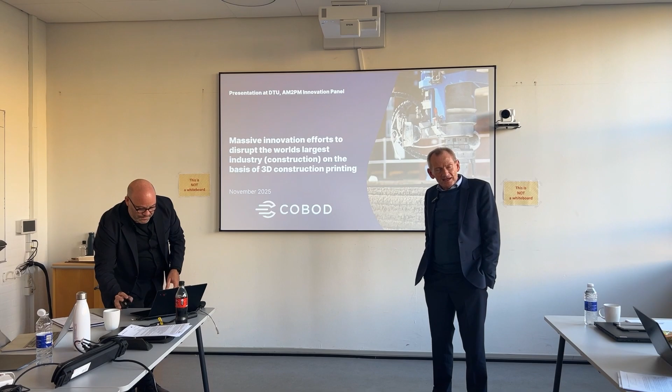Basically, we are trying to change the biggest industry in the world. That's a major undertaking, and we are trying to do it globally, so you almost cannot do anything bigger. So my thought has always been, we need as much help as we can get.

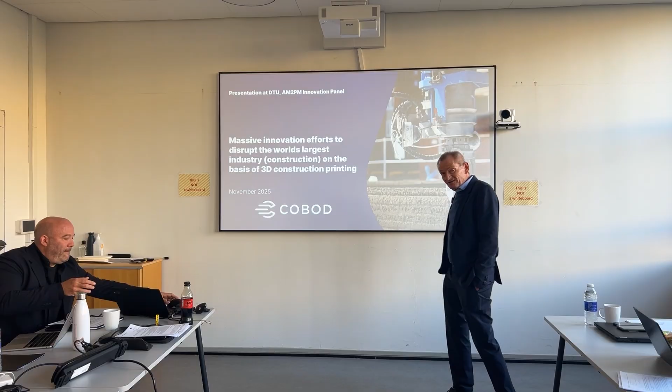Whatever you guys can bring to us and help us with is great for us, which is why we have always fertilized these academic relations and cooperated with academia in many different countries. We also actually sell our printers to a lot of universities. I think by now we have them at 7 or 8 universities, both here in Europe, in the Middle East, and in the US.

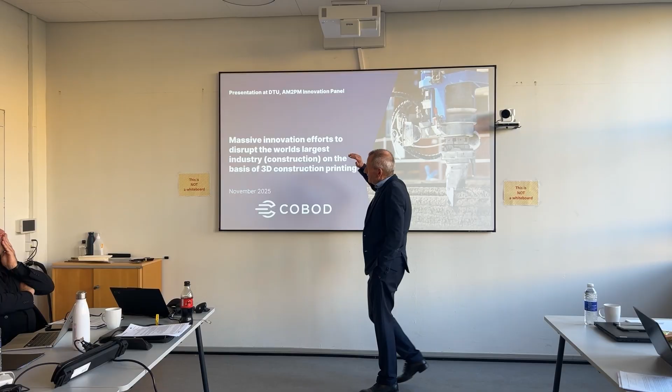Because we are trying to change the construction industry globally, we have to do massive innovation efforts, because we are trying to disrupt this industry on the basis of 3D construction printing.

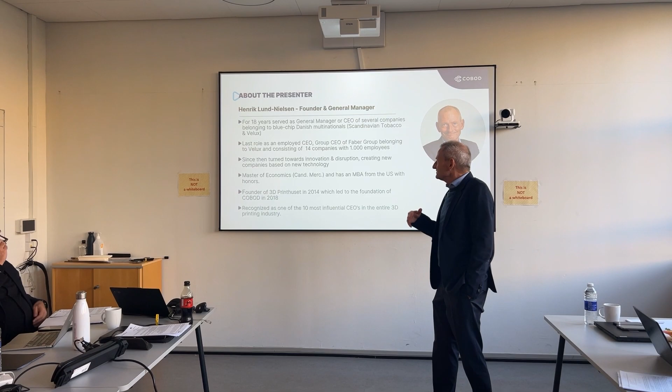And yes, it's true, as Aaron said, I was a hired gun. I was the CEO for the first 15 or 17 years of my career, ended up being group CEO of a company with 1,000 employees. I'm mentioning that just to make you understand I'm not green behind the ears. And you can also just look at me and see that I'm not.

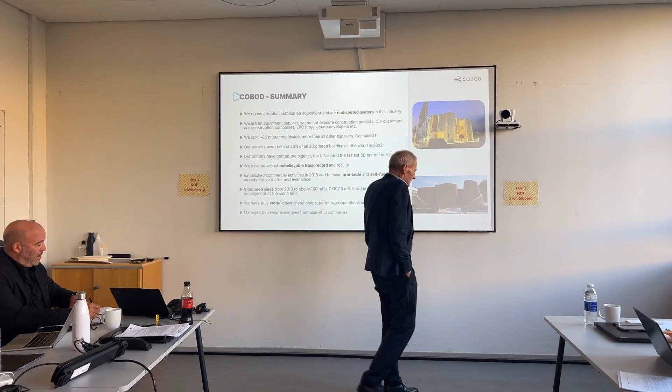But that's very different from other tech startups. So, summary about COBOD: what is very important to understand is that we don't do construction projects. We do technology, and we sell technology. We are a Caterpillar kind of company.

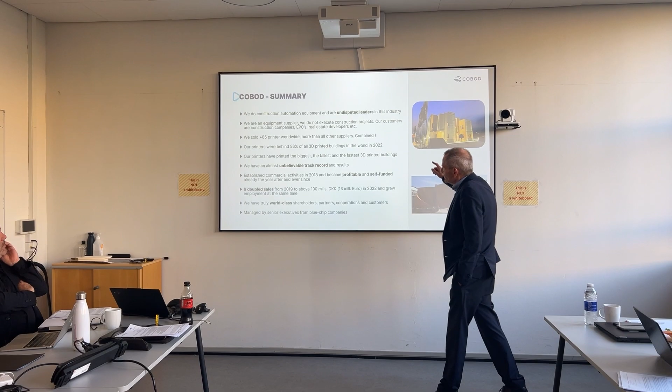We've now sold 85 printers worldwide. That is more than all other suppliers combined, even when you add up their sales. Most of the others have sold 2, 3, 4, compared to our 85. For instance, in '22, we counted all the 3D printed buildings made that year, and 56% of them was made with our technology. So we are clearly dominating.

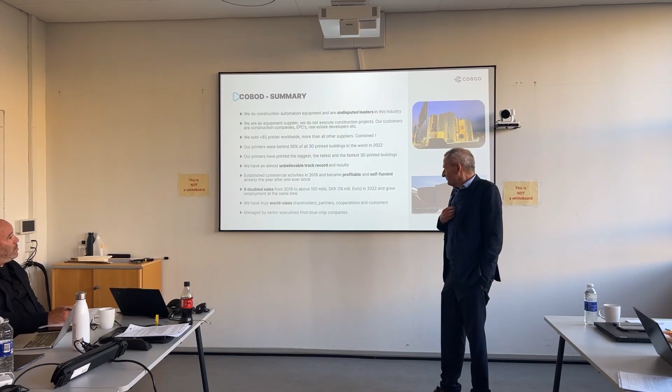We have also printed the biggest, the tallest, the fastest building, and so on. We have an unbelievable track record, also from a finance point of view, which is important to me: we became profitable already after 1 year. We had 1 year of losses, and then we started making money. That's very unusual for a tech startup.

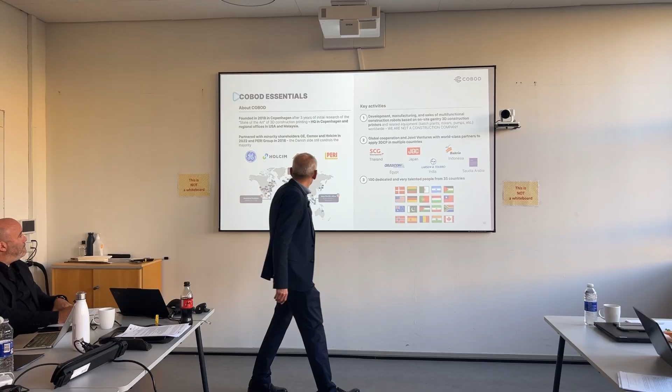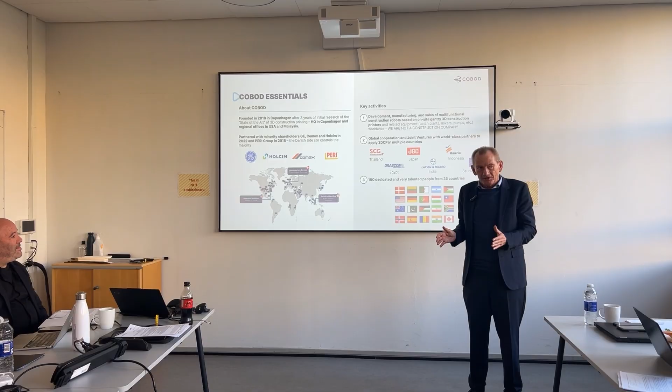If you don't give concrete shape with 3D printing, you give it shape with formwork equipment, and PERI is the leading provider of that worldwide. So that was a great quality stamp on us, that the biggest manual competitor came and said, hey, these guys we can't beat, we better join them. That was really nice.

Cemex, the 5th largest cement and concrete maker in the world. Holcim, the largest in the world. And then General Electric. So quite powerful minority shareholders, but Danish side still controls, we still have majority control.

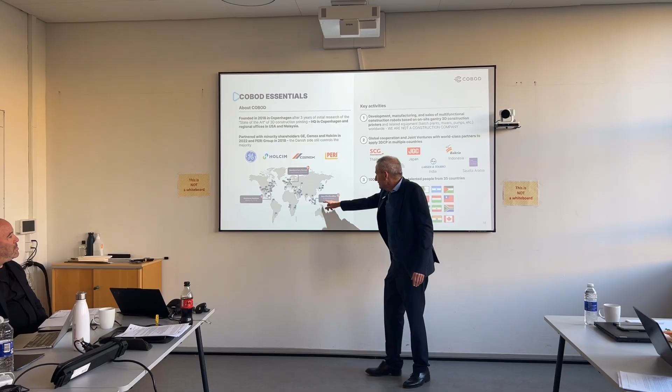As said, head office in Denmark, offices in Florida and Kuala Lumpur. Every time you see a flag, and it's not all flags that are there, it represents where we have printers, and you can see we are spread all over. We are on all livable continents of the world.

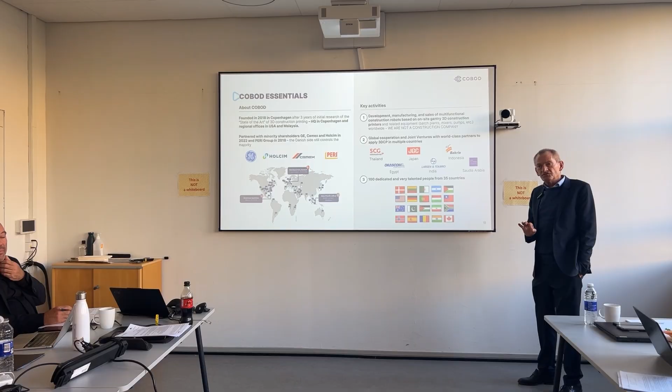So that's what we do. We develop, we manufacture, and we sell what I call multifunctional construction robots based on 3D printing. That will make sense to you later on in the presentation.

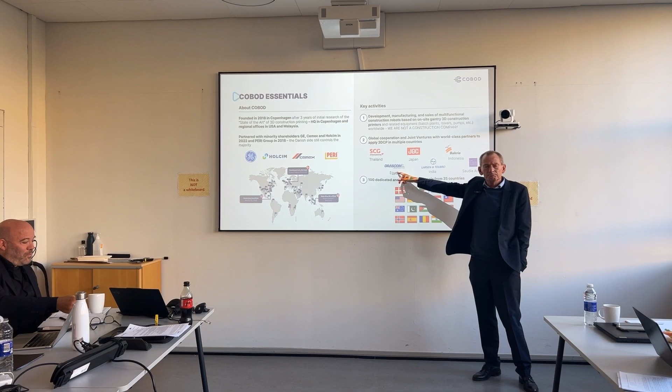Besides our shareholders, we also have some fantastic customers. Any of you know this company? Danish origin, actually, founded by 2 Danish guys back in 1938. 130,000 employees, biggest construction company in India, biggest construction company in Asia, huge company. Orascom, biggest construction company in Egypt, 50,000 employees, and so on. So we have a lot of high-power customers.

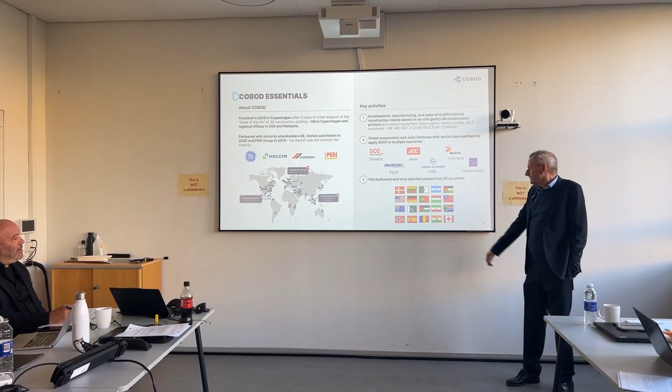Also quite fascinating, we are probably around 100 people, coming from 35 different countries. From the beginning, we have said we want the best talent, and we don't care where they're coming from. So it's a whole mix - we have Muslims and Hindus, people from all over the place. We actually have more international staff than Danish, and a lot of them are coming from DTU.

So why were we created? We were created to cope with this huge problem of construction, which is the lack of productivity.

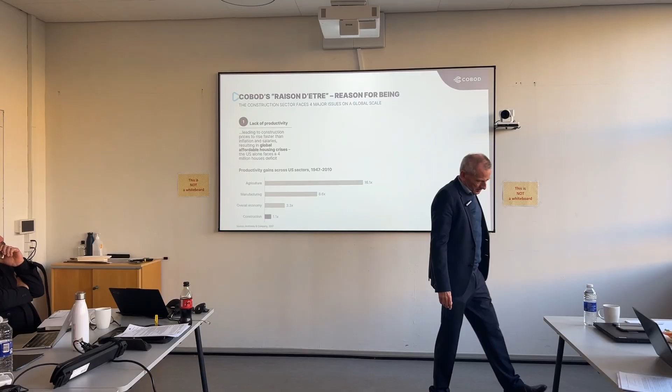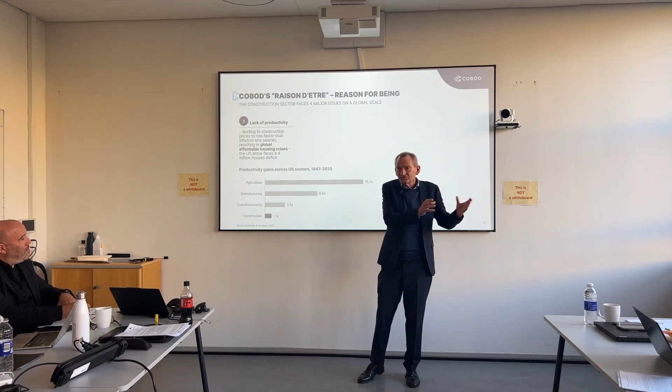All other industries have been industrialized and therefore increased their productivity. Relatively speaking, their products have become cheaper and cheaper. Think about a car: if you buy one for 30,000 euros now, the same car 20 years ago, in much worse quality, also cost 30,000, because productivity gains ate the increases in material cost and labor cost.

That didn't happen for construction. That's why we see a housing crisis almost everywhere. We are getting richer and richer as countries, but fewer and fewer people can afford their own house. This is the reason: lack of productivity. Hence, there's a huge need for automating and industrializing the construction industry.

The other reason is, of course, nobody wants to do this work anymore. Ask young people to do physical construction work - no, thank you. Give them a laptop and let them play around - yes, please. This is a huge problem, especially in a country like Japan. For every 5 people that retire in the construction industry, they can hire one. They simply run out of people to build, so we need to automate in order to continue building the same amount.

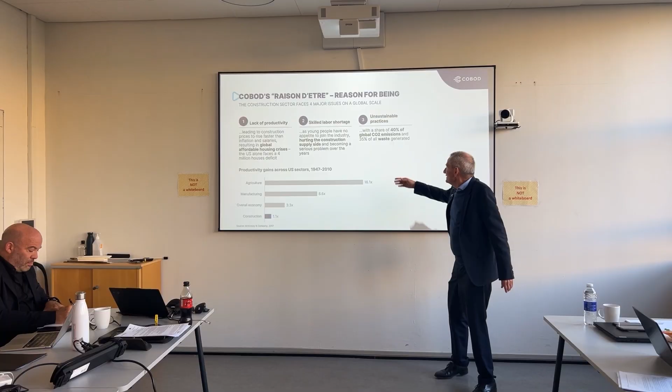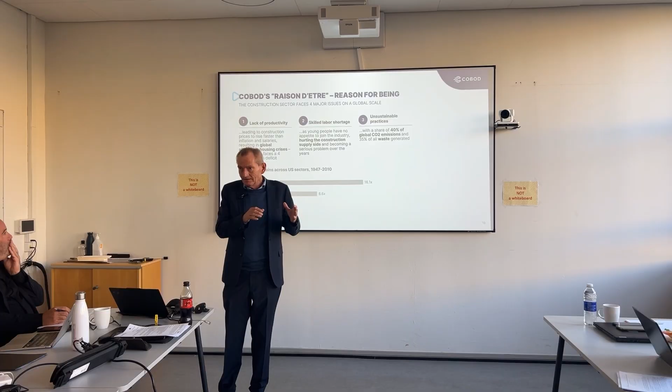And then, as you also pointed out, Aaron, it's very unsustainable what we do. A big part of that is we use concrete, and concrete with its CO2 is not good, but it can be made better. The cement factories are really working on it - they're working on becoming net zero by 2050. They will have changed the way they produce, so they'll have net zero cement.

The other reason is that we simply use too much material because of limited design possibilities. When things have to be straight all the time and have 90-degree corners, you end up spending way too much material. I'll give some examples of that.

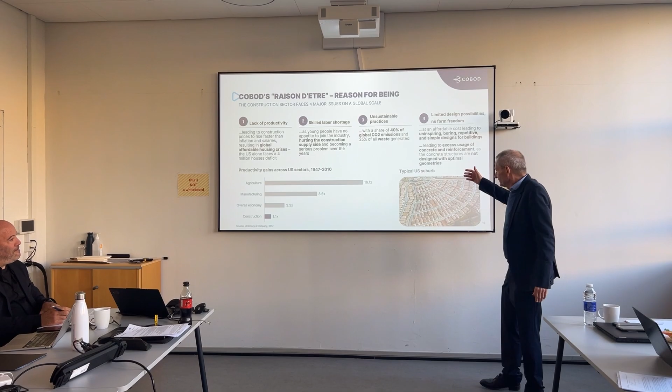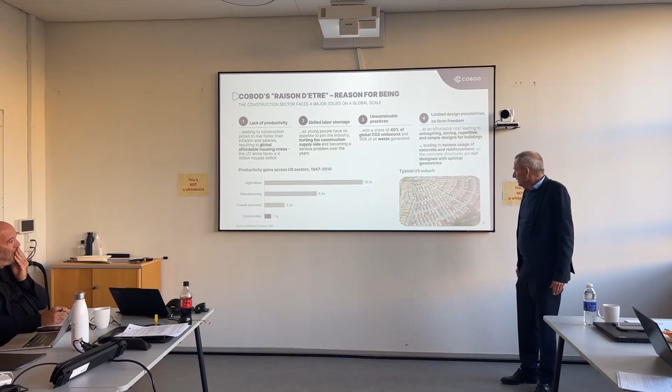Also, the other consequence of limited design possibilities is you create these boring designs and then repeat them because creating new ones is simply too expensive. So you end up like this - this is a US suburb - you get dropped off, you live there, but you can't tell the difference because they all look the same.

So this is where we can help, because we can automate, which means lower labor cost and less need for scarce skilled workforce, more precision, quality, and safety. Speed - we can execute much, much faster.

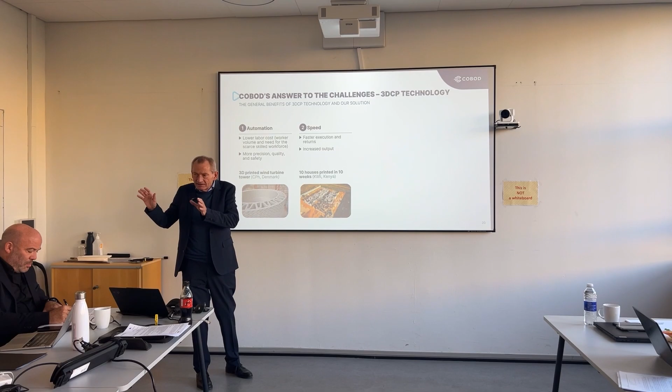This is an example from Kenya. Try building something in Kenya - 1 house, 1 year. Here we did 10 houses in 10 weeks. We didn't do the entire house, we did the walls - or rather, our customer did. Sustainability - this is what I spoke about before.

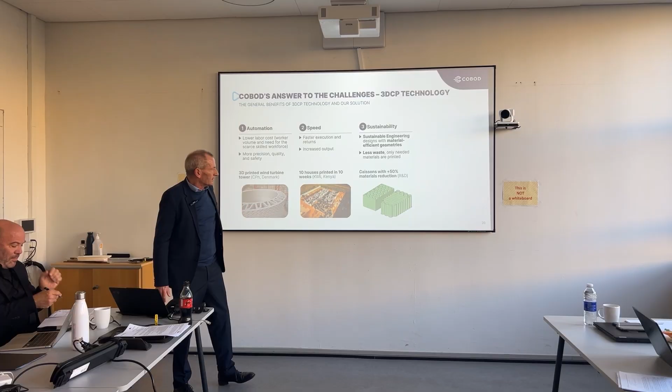This is a traditionally made caisson underwater foundation. This is an optimized design, because we can optimize it - we can give it the geometry that provides maximum support to the structural engineering solution. 53% less material. For years we built it the traditional way because that's the only thing we could figure out with conventional solutions, but we couldn't do it like this and spend half the amount of material. Mind-blowing, huh?

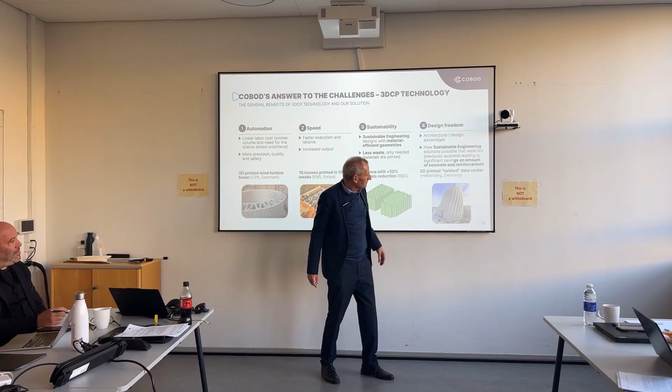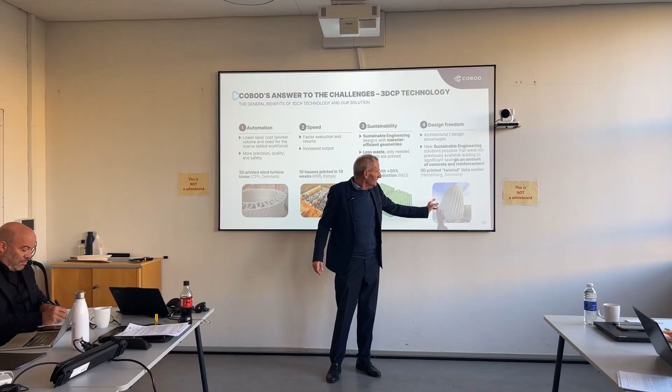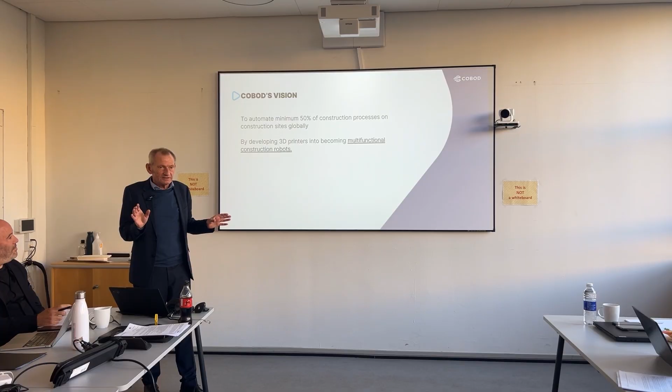So our mission is to enable the construction industry to build smarter using multifunctional construction robots based on 3D printing. We want to do visually appealing things with high quality, both buildings and concrete structures, faster, cheaper, and more sustainable using our technology. And the vision is that at a certain point we can automate 50% of all processes on a construction site - not 100%, that's too much, that's probably never going to happen, but at least 50%.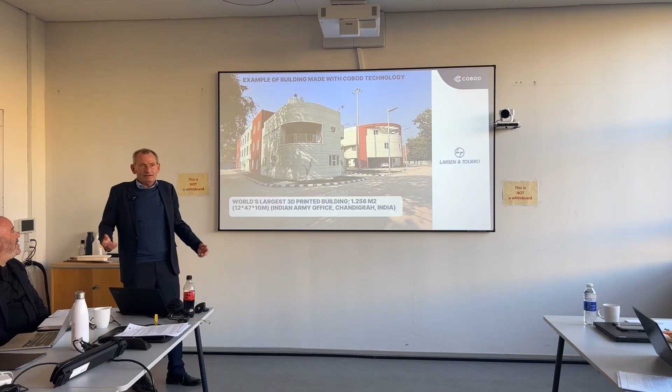This is the largest 3D printed building in the world presently. Unfortunately, we have not been able to do PR about it because it's for the Indian army, so it's difficult, but it's quite nice, huh? Actually, the whole site has 4,000 square meters of 3D printed building. So forget this thing about printing 50 or 100 square meter houses - this industry is becoming bigger and bigger, taking over more and more construction jobs that are bigger and bigger.

This is an example from Ireland - it's a row house, one unit, one unit, one unit, 110 square meters each. Built 35% faster than conventional construction, and built according to the new ISO standard. Really nice - is that rounded corners or does it just look like that? They're always a little bit rounded because we can't do 90-degree corners.

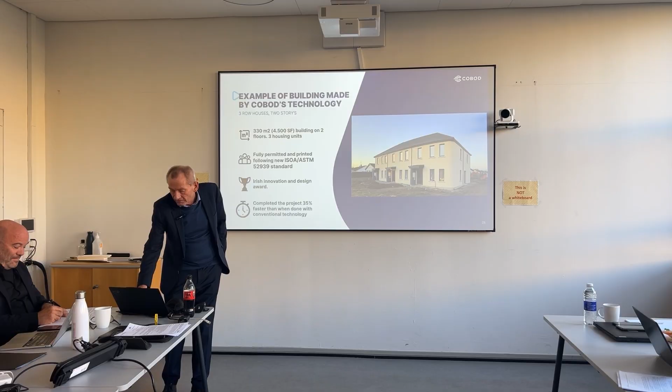This is a video of how it was done. Is it playing? Maybe I have to do... yeah.

So where we are distinguishing ourselves from the competitors is scale, right? We do big things.

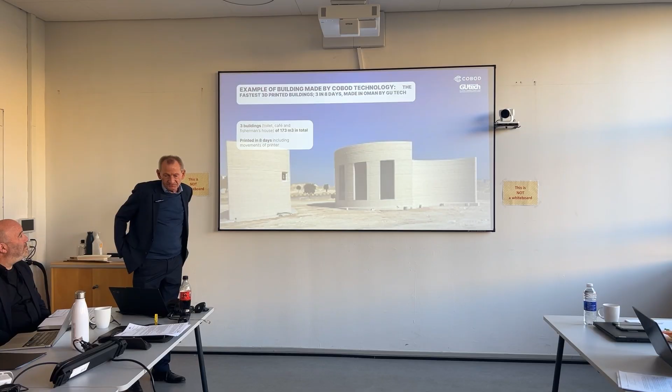This is examples of how fast you can build. This is from Oman. They did 3 different buildings, respectively a toilet, cafe, and a fisherman's house in 3 different locations. First they set up the printer here, then over here, so they moved the printer. 3 buildings, 8 days. That's 2 to 3 days per building, right? And because we're in the Middle East and it's bloody 48 degrees during the day, they print at night.

That's so impressive. Yeah, and the next one is drink some water, because it's very hot. Even at this time it's 40 degrees or something, right? Yeah, this is a small toilet, it's almost printed in just one evening. Anyway, you get the idea.

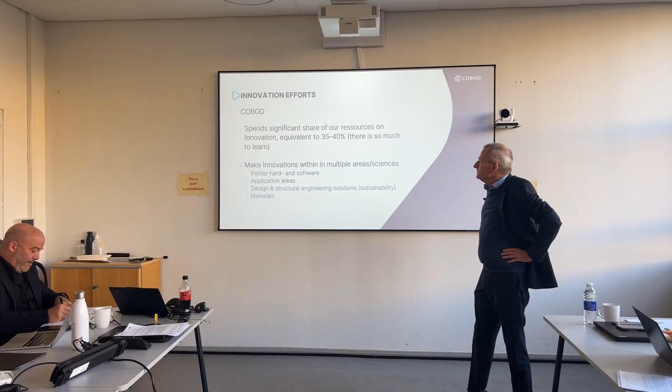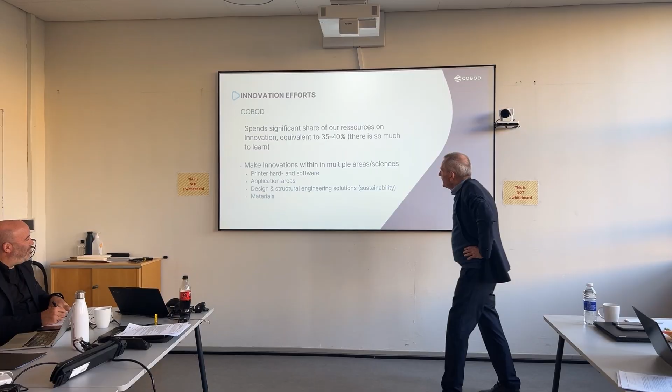Focusing now on the innovation efforts, we spend a really large share of our resources, our people, our cost, on R&D, on innovation. It's 35 to 40%, so it's a massive amount. I think it's even more than Novo Nordisk. And we still manage to make money, so this is not bad, huh? Yeah, at least until further.

So we do make innovations within multiple areas or sciences. We do, of course, printer, hardware, and software. That's what you normally think about that we would do, that we would develop our technology and the related software. But that's not it.

We also do, that's actually where we do the most, in terms of application areas. So we are the first to think about how our technology can be used for new application areas. Because the thing is, the customers will not buy our technology for an application unless we have proven that it can be done. So we have to go in the front and do it.

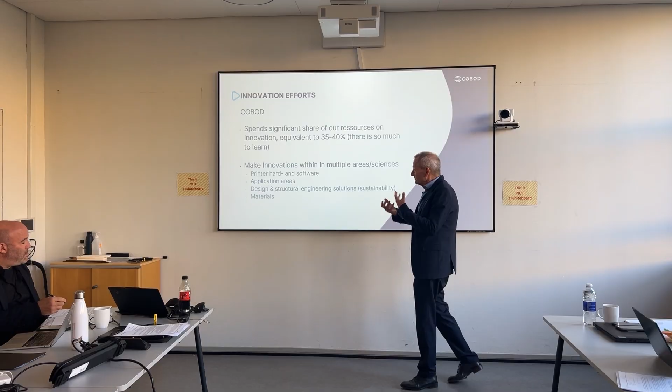Then, of course, we do design and structural engineering solutions. You saw that before with the caissons, and we also do it on materials. So we have a lot on our plate, which is why we need all the help we can get.

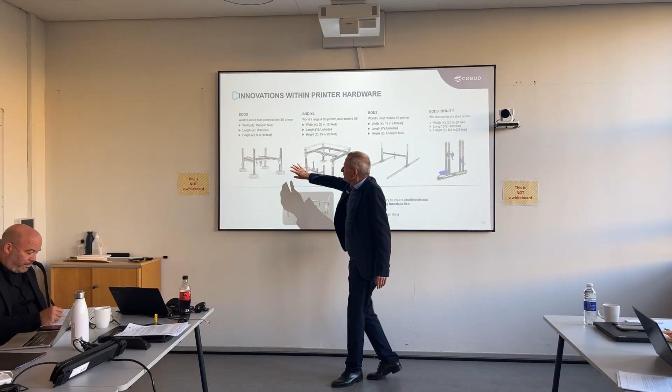So you've seen a lot with this printer. This is BOD2, the best-selling printer in the world. Of the 85, probably 70 of those are BOD2s. But we have later developed 3 new printers: the XL, extra large for size, BOD3 for multiple houses, and BOD3 Infinity for warehouses.

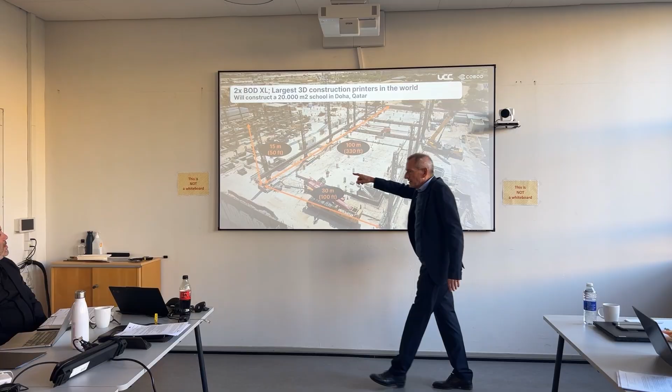I'm not going to show the last one, but I'm showing the 2 middle ones just to give you an idea. This is the biggest print job in the world, these are the biggest printers in the world. Notice what we speak about here: 100 meters in length, 2 printers, 50 meter lengths each of them, 30 meters across, and 15 meters in height.

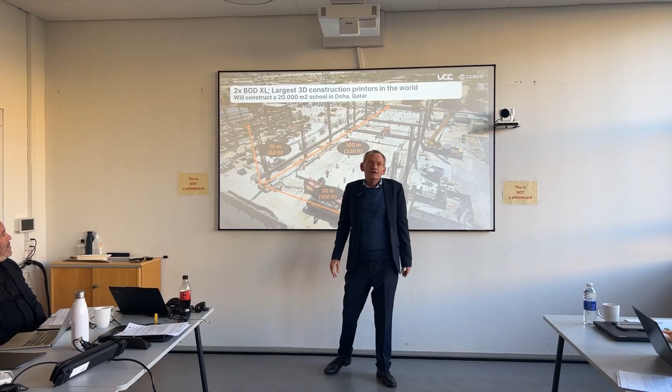So yes, do we think we can print apartment buildings of 5 stories or whatever? The XL comes up to 25 meters, in this case it's only 15. Do we think we can do that? Yes. Do we think the way it's been made so far is not optimal? Yes. Why? Because we're using panels, elements that come from an element factory. They have to put reinforcement in, no matter whether it's needed in the final building or not, because otherwise they can't lift it out of their mold, they can't transport it, and they can't crane it in.

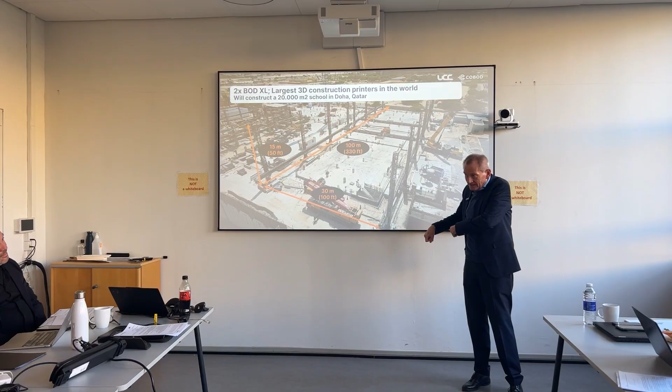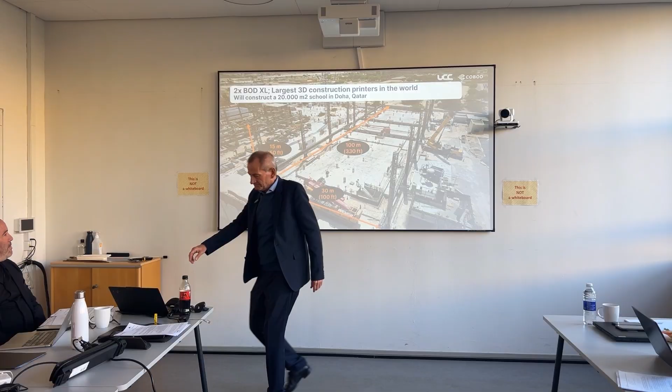So think about that. I think a lot of the solutions we're doing today with precast elements, they are wasting material, simply because their production method in the factory requires that you have the reinforcement, not at the final building site.

I had an example with a German garage manufacturer, and he said he made it as precast, the whole garage. And then I said, what is the competitive solution? Well, that was bricks. I said, are the bricks reinforced? No, they were not reinforced. And then I heard about how much reinforcement he put in. Actually, we analyzed his cost: concrete, reinforcement, labor, transport, installation.

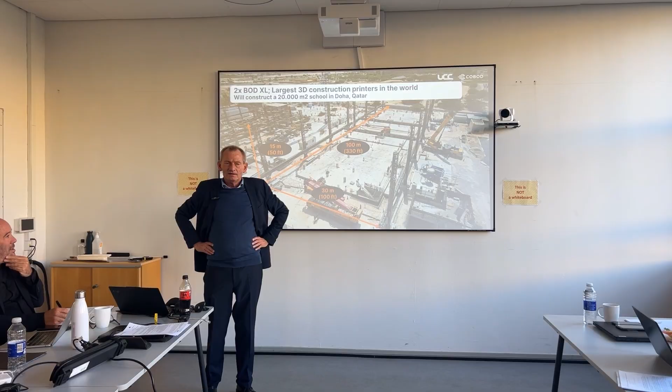What was his highest cost? Reinforcement. So I asked him, of this reinforcement that you're putting in, how much are you putting in for the benefit of the customer? And he looked strangely at me and said, but Henrik, everything. I said, are you sure about that? Yeah, all the reinforcement was put in for the sake of the customer. I said, I don't get it. You just told me bricks were the competitive solution, you also said bricks have no reinforcement, and I think we agree that bricks are not as strong as concrete.

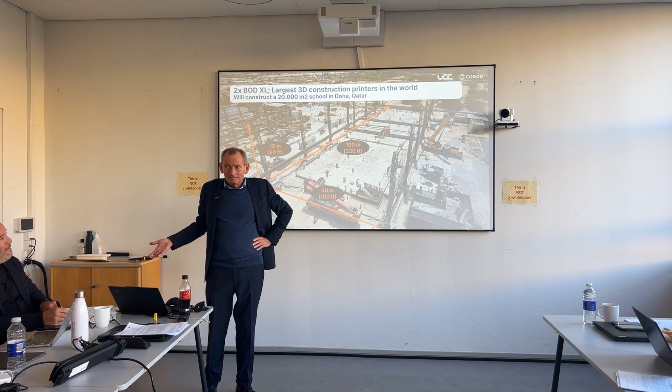Yeah, of course. Well, then you'd put in all the reinforcement for you to be able to precast it. Not because the final building needed it, but because I can build with the softer material without reinforcement.

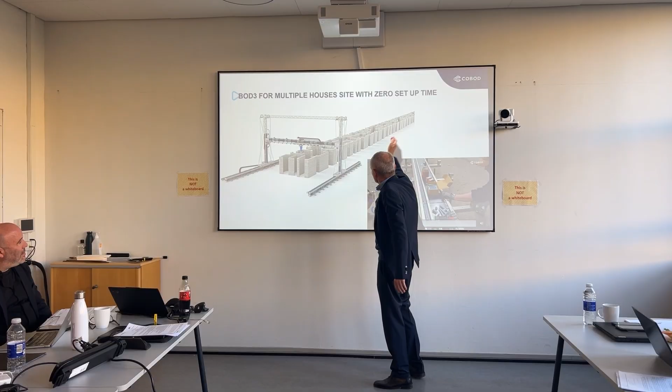Mind-blowing, huh? This is the BOD3, and just a visualization of how it's meant to be used. One house after another. We've developed these wheels so you can take several of the modules and move them very fast. So the idea is you start here, and when you're finished, you take these and move them there. So constantly, there's no length limitations.

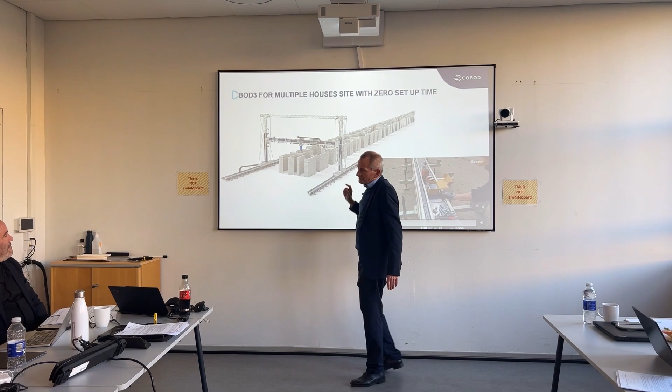I forgot to say that all our printers are modular. Every time you see a logo, it's 2.5 meters, and the modules can be interchanged between the printers, so we don't have to produce so much.

So now turning to how do we make these multifunctional construction robots. Well, we do that by adding other tools to the printer. Here we see the print head as normal, but over here an extension arm running in between two x-axes, and at the end of the extension arm there's another robotic arm holding a shotcrete gun. So now we can shotcrete and 3D print at the same time. Multifunctional construction, right? But it could also be like this.

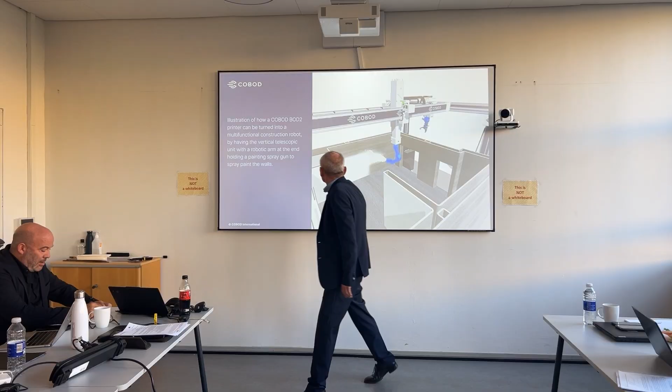Extension arm, robotic arm, and then maybe a plastering, painting, or insulation tool. By adding the robotic arm, we get a lot of functionality. We can do all kinds of things with the printer. So it's no longer a printer, it's a multifunctional construction robot.

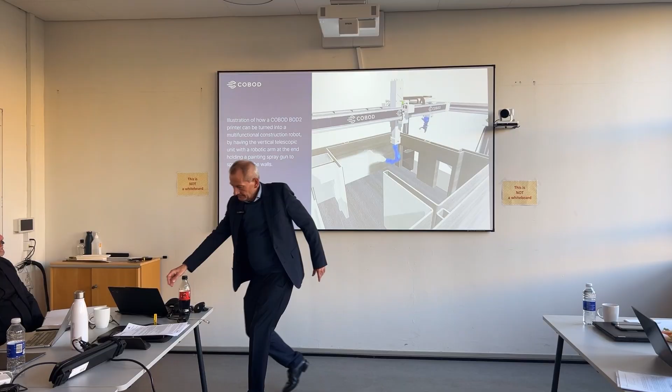We develop all this technology, but it's also a question of getting better to use it. So here's an example, from the first time we did the Europe's first 3D printed building. We messed up a lot, sorry for my language. It took 2 months. Then PERI came and made the investment in us.

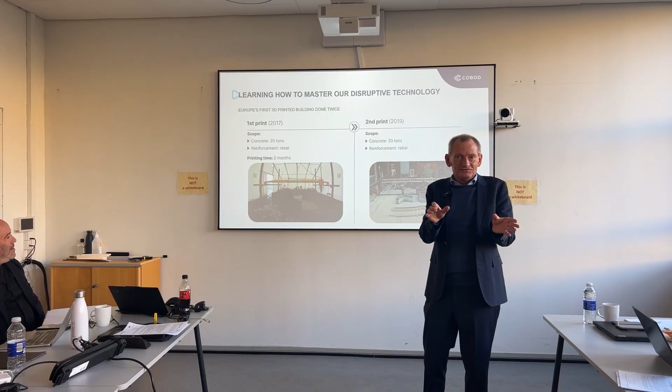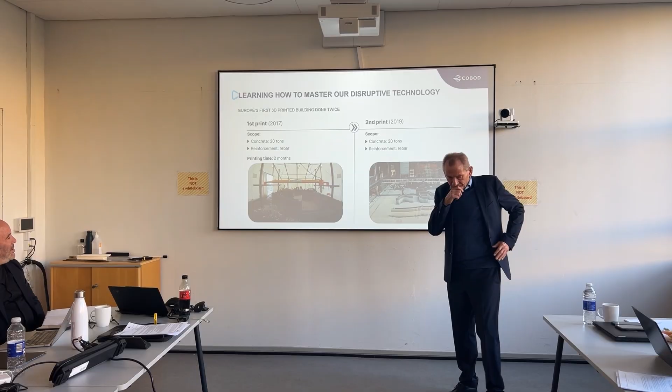And I then said to my guys, listen, we need to do something to impress them, because PERI's management was coming to visit us, 8 guys for a whole day. So I said, we need to do something so they can really see that we spent their money wisely. And in the meantime, we had done the BOD2 printer that you see there. So I thought, we're going to print the same building again, not on a site, but within a warehouse, so we can prove how fast we are.

So we were sitting in the meeting room, and I asked the management, I said, I've thought about maybe printing the BOD building, that's what it's called, one more time. How fast do you think we could do it? One guy said maybe half the time, so 4 weeks. Another guy said 3 weeks. And the most optimistic said 2.5 weeks.

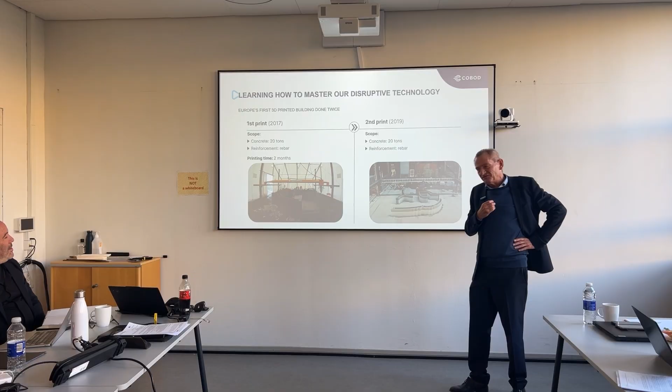I didn't say anything, we drove over. This is in the tunnel factory, I don't know if any of you have been there, it's a very, very big warehouse. We drove in, and when we came in, the building was standing there. They were looking at me and said, you're crazy, Henrik, you actually did it. I said, yes.

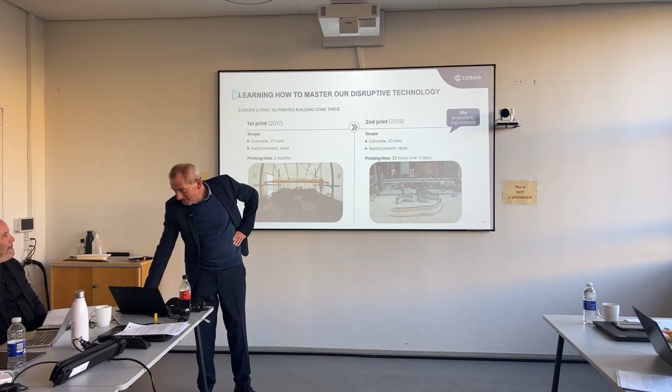And how long did it take? 28 hours. Came from 2 months to 28 hours. And typical COBOD style, we document everything.

They were impressed. With the clock, yes. Yeah, that's very important. Yeah.

Actually, the first 2 days we printed half of it, and the last day we printed the other half. So we learned as we went, right? There's so much learning to do, even for us as the developer of the technology, in order to master the use of it.

Oh, now I went too far. So the other innovation we're doing is within application areas, as I said. So we came up with the idea of 3D printing windmill towers.

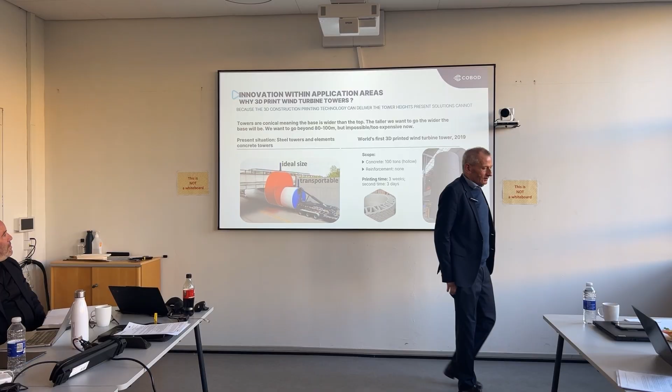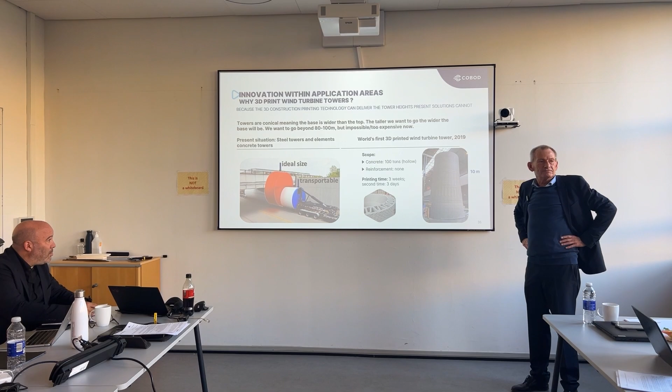When General Electric called us, they wanted to discuss, they said, you printed this building in Copenhagen. I said, yes, but that's probably not what you want to discuss with us. They said, no, but it was a secret, we had to sign an NDA. I said, but it's a no-brainer, you want to print windmill towers? No, they didn't say that. I said, no, I know, I said it. But anyway, 2 months of discussion with a bloody NDA, and what did they want to do?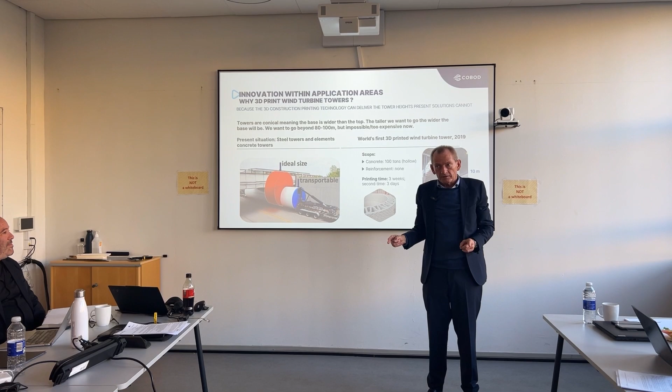Do they want to go taller than 80 meters? Yes. Is that possible with 3D printing? Yes, we have a factory on wheels. We just bring the factory to the installation sites. No transport limitation, we can do it as much as we like.

So that's why General Electric became a shareholder. This is an example - they didn't just buy a printer. They said, first you prove that you can print a tower of 10 meters, and then we will consider buying a printer. This is from the first print, and you can see there's a lot of people running around.

It's actually not my guys, it's General Electric and Holcim. So it took 3 weeks, and they were super happy from General Electric. And I was like, yeah. And they asked me, Henrik, why are you so grumpy? You're normally a happy guy. I said, well, I don't think it was good.

I mean, I think we spent way too much time. And then they said, what do you think next time, how fast could you do it? I said, maybe not the next time, but after 5 times, we could do it in 3 days. The year after, we did it, a bigger one, and we used 3 days. So from 3 weeks to 3 days because of experience, right?

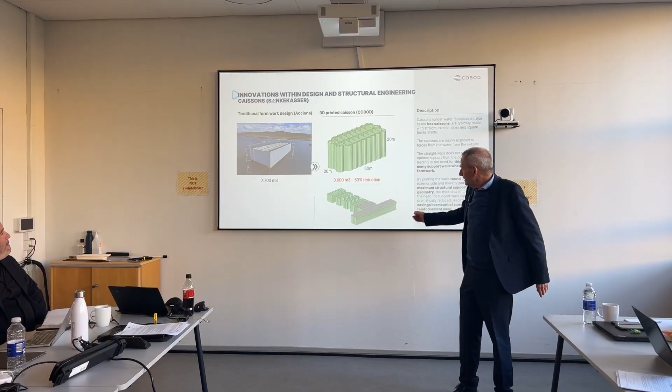Anyway, here you have the caissons, as I spoke about. It's quite obvious when you are an engineer, right, that if you have water pressing in, it's fucking stupid to make a straight wall, right? Because that's the weakest you can do. Why don't we bend it out?

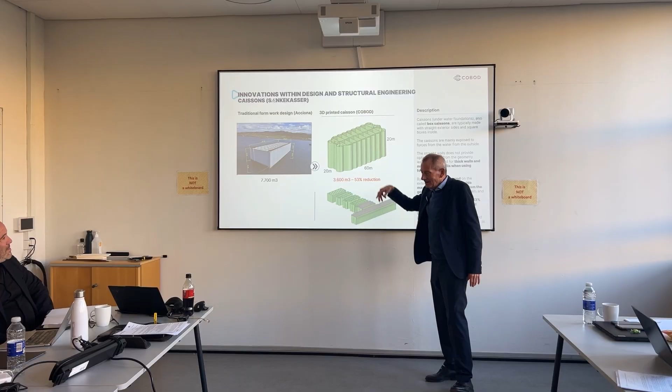And then they went, it was Acciona from Spain, they said, yeah, but we can't do that. No, I said, but that we can do, so that's not a problem. So we designed it like that. Our head of innovation is extremely fast. He does a drawing like that in like 3 minutes while we speak. And then we said, so what do you think about this? This is like a first trial. And they said, wow, we've never seen anything like it.

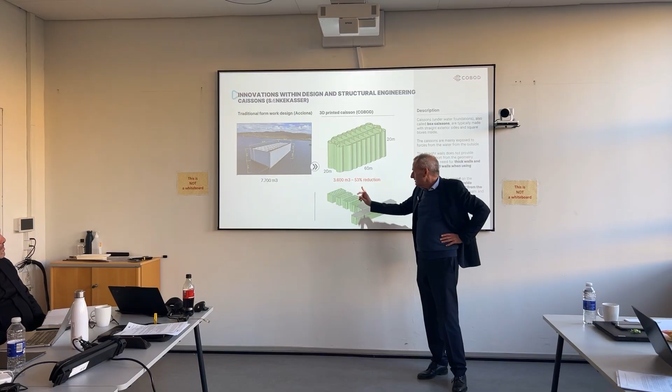And we thought, well, can it work? Maybe, so let's do a workshop. So there was a 2 day structural engineering workshop, and they ended up with that design, 53% reduction. 53! We're wasting materials because of stupid structural engineering solutions, because of limitations in the way we have manufactured things. Yeah, but that's how it is.

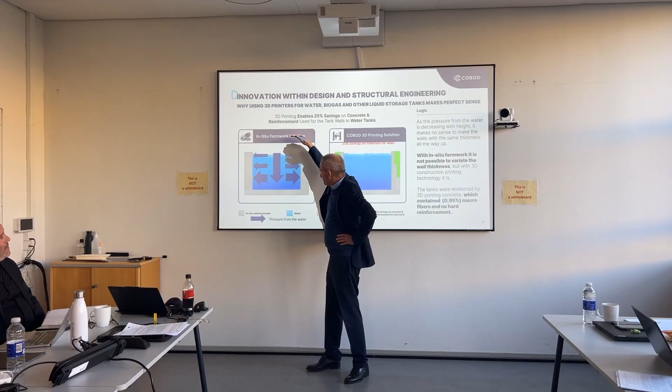And now I'll come with an even more stupid example. Okay, this is a tank, right? The pressure, of course, you know that, is a consequence of the height of the water that is above, right? So down here, we have a lot of pressure. In the middle, not so much. And on the top, almost nothing, right?

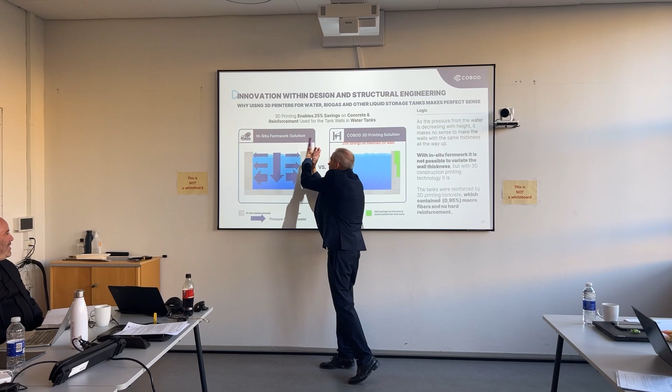So how do we do it in the real world when we cast these in situ? We get clever structural engineers, probably educated from DTU, saying, here we need 40 centimeters. And then we do 40 centimeters all the way up, because that's the only thing we can do with our solution. And I'm like, that's so bloody stupid, because we don't need 40 centimeters up there, right?

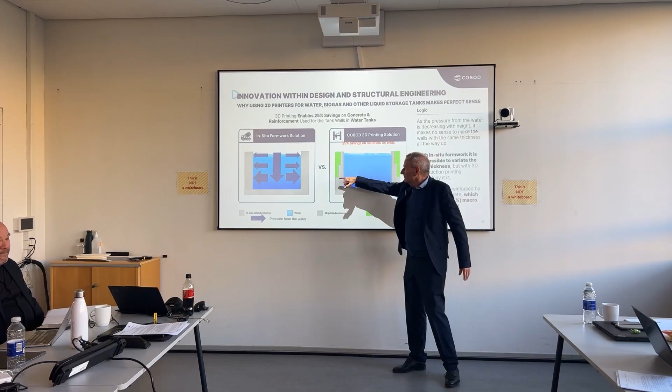So first, simple solution: we just print with a 40 centimeter nozzle, then a 30 centimeter nozzle, and then a 20 centimeter nozzle. Then, of course, long-term the vision is to print with a variable width nozzle to really optimize it further. But think about it - all tanks that have ever been constructed have spent 25 to 30% too much material. Stupid.

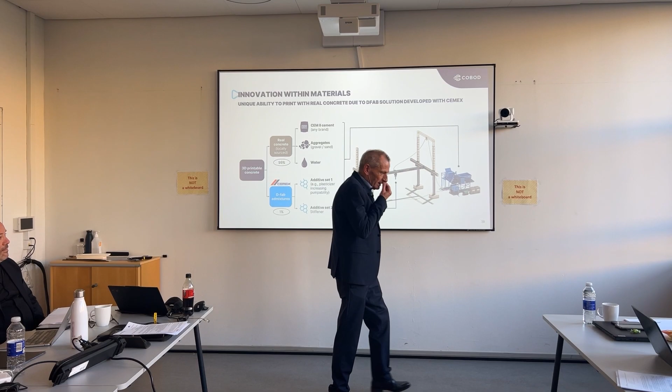Finally, we print with concrete. That's very different from all the other guys. They run around with their small robotic arm printers that cannot print anything, and they use a mortar that's way too expensive and not known in the building code. We print with real concrete.

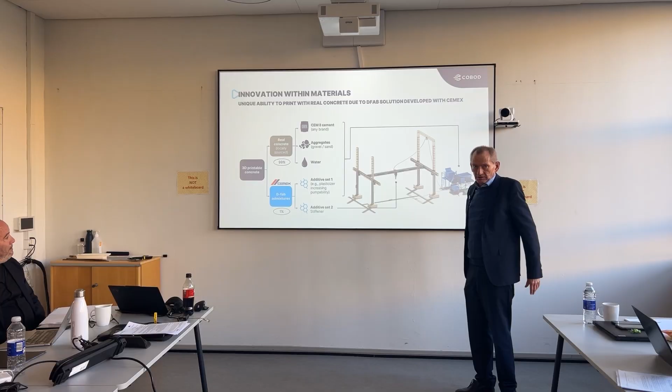That's an innovation we've done with CEMEX. We have two sets of additives, so we use completely normal cement, sand and gravel, completely normal, water, everything sourced locally, not linked to any brand. This was a requirement from our side. It could not be a CEMEX solution where only CEMEX cement would work. It had to work all over the world, no matter the brand of the cement.

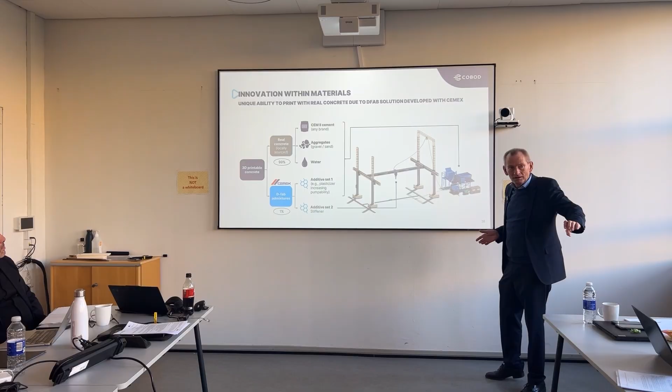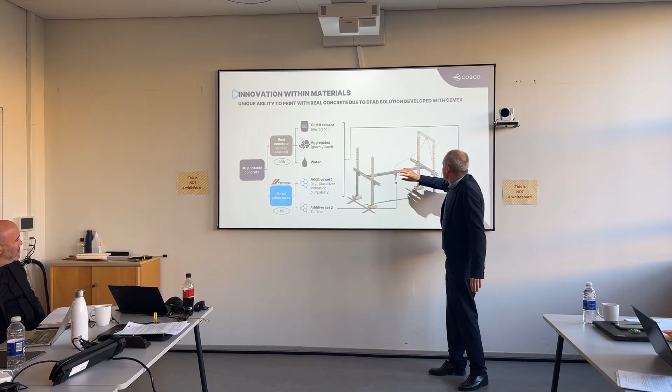Two sets of additives. One set we put in here, a plasticizer, making the concrete very flowable because it has to go in the hoses. When it comes up here, we don't want it flowable and goes out, we want that it's stiff and it forms stable. So up there, we add a stiffener, another set. So we did the hardware technology, and CEMEX developed the additives. So now we can make concrete all over the world based on local available materials.

That's a big part of why we have become so leading in the industry. And that's it, thanks a lot. This one, look at this. I still believe.